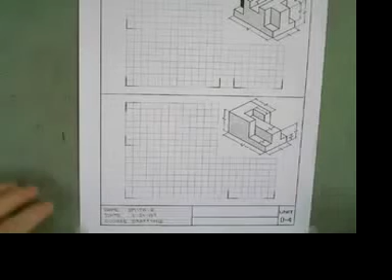Let's move on and finish up this packet with drafting plate D4. Start off by squaring up the plate off the title block line, drawing your 1/8 inch guidelines lightly, and fill in the title block name, date, and course.

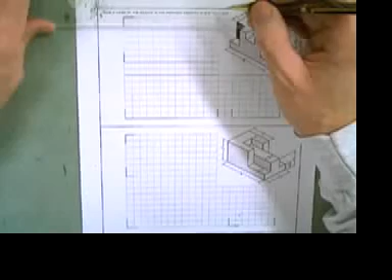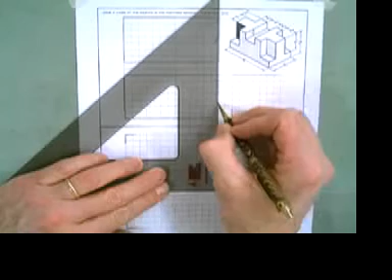We're going to start off again with the top exercise, and I'm just going to go through it without much talking. Let's get those views drawn first. Remember, the two blocks between the views have to be left with 1/2 inch space between views. I'm going to draw all of my outside shapes for both activities first, so we can just be ready to roll.

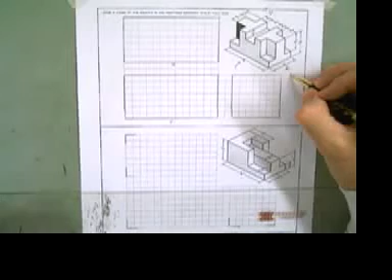Draw some vertical lines. You can play and pause this as needed. There's front, that's the top, this is the right side. It's going down here. Do the same thing here. I'm drawing our outside shapes first, not our rough shapes.

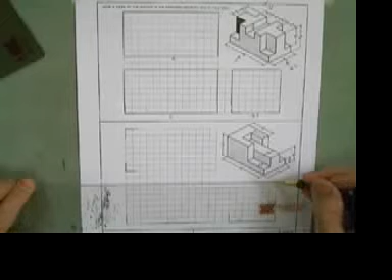Going to leave those two for the views between. Slide it up to the top, do the same. Let's get that top view. Bring our square in for our vertical lines.

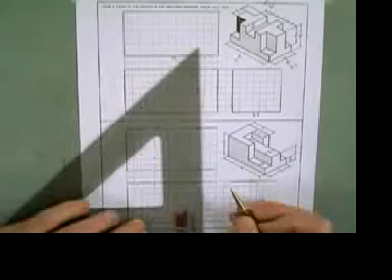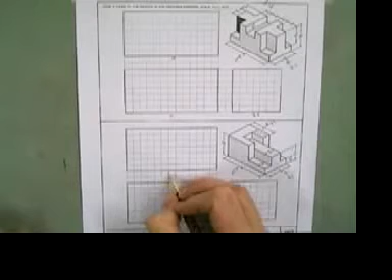These two block views look a little more difficult, a little more complex, but they're really not. You just follow along your measurements, and I'll kind of talk you through them. Again, front, top, right side. You have the front.

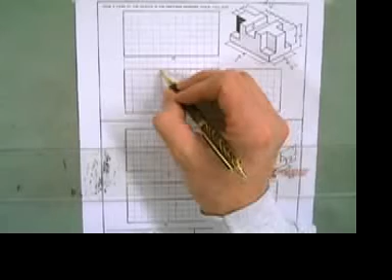Always start with the front, then the top, and the right side. You're going to move up, and it's just a simple matter of counting each one of these little vertical lines. The measurements given on the back side of the block: we're going to go 3/4 over, 1, 2, 3. Then 1/2, which is 2. We're going to go 3/4 again, 1, 2, 3. Then 1/2, which is 2.

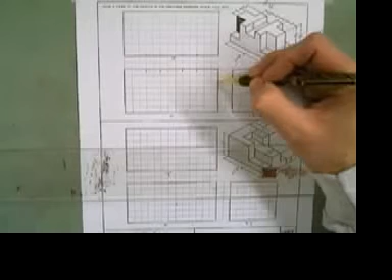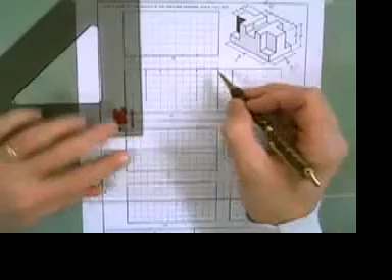And the last one is 3/4. Remember that these lines all line up with these, so they'll carry over to your top view. And these cutaways drop down 1 1/4: 1, 2, 3, 4, there's 1 1/4. So we're going to come down that far and start drawing lines in. Same over here, so we'll come down to the same plane. In fact, these come in 1/2, so they'll come down to this point, down 2 squares. We'll draw those in, there and there. Then all we have to do to finish up that front view is connect these lines—it's that simple.

That's pretty much the front view of that block, except this is an open area, so we have to really erase that.

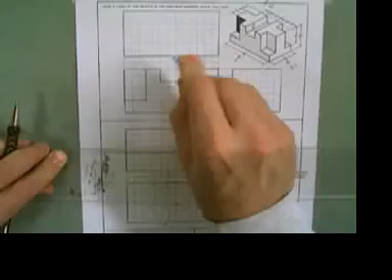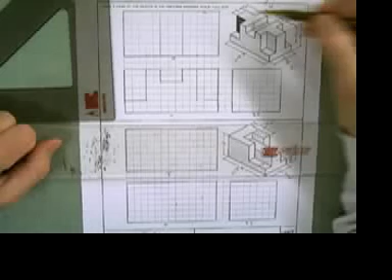Let's move on to the top view, because that's easy—these lines just continue straight across. These two do, so all we have to do is continue those two, straight across. Then we're going to come in 1/2 inch for these, and then 3/4. So let's just go in 1/2, and 1, 2, 3. You only have to measure it once, because we can use the drafting tools to come in here down to this point.

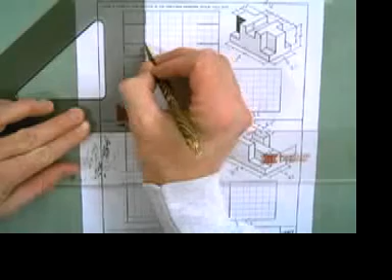Let's go ahead and do this one, because they are on the same plane. Slide it up and draw this one, and this one. Then two vertical planes, two vertical lines, and the top view is pretty much wrapped up for you. There, and here's our original mark, measured in, there—and that is the top view of that block.

This surface, this surface, this surface, and then 4 on either side. There's that one, that one, that one, and the 4 on either side.

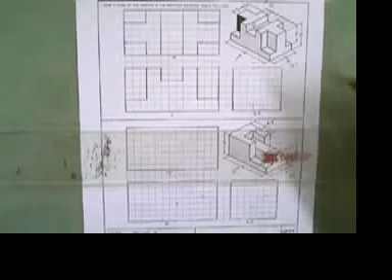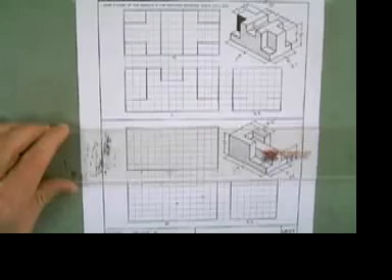Right side view: here is even with here. Remember we came in 1/2 inch and 1/2 inch, so all we have to do is draw it in 2 blocks, 1/2 inch from either side, to get these measurements here and here. Then we'll just need to draw it straight up to the top, so we just need 2 vertical lines, and it's got our 3/4 of an inch.

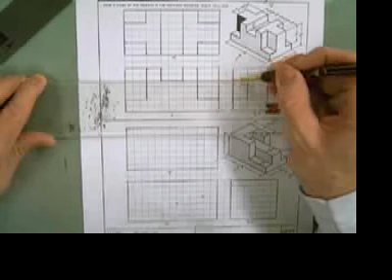Now this, if you look from the right side, this opening—there needs to be a hidden line across on this plane, so we'll just bring the T-square up and show our hidden line. You can't see it, but you have to represent it with a hidden line. So there's the hidden line, and that's that view completed.